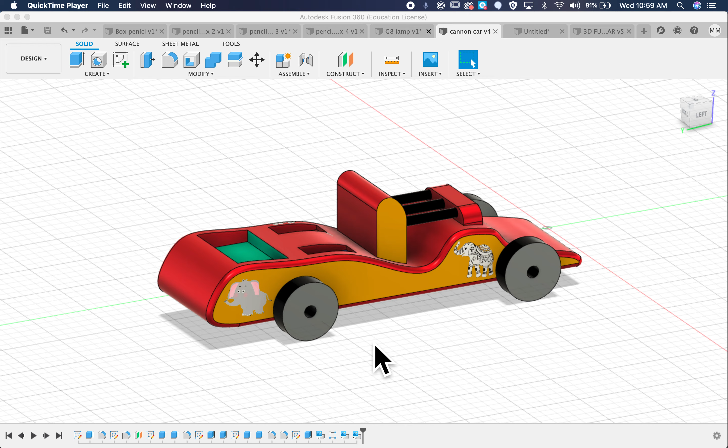Welcome to a quick tutorial on how to create more visual representation of your car by adding decals. You can see there are a couple of decals here, adding wheels and coloring it.

First thing I'm going to turn off all my sketches because I don't need to see them. I don't need the origin either. All right, so I got my car.

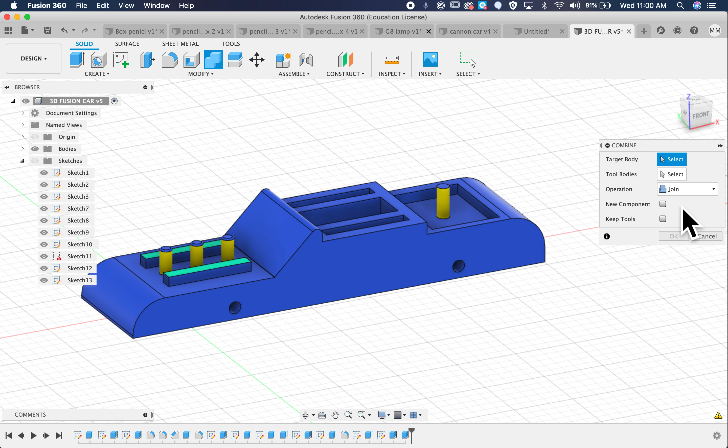To color your car, you're going to go into the Modify menu and pull up Appearance. And you probably have just a steel satin.

So if you duplicate it, right click or control click and bring up this menu, hit duplicate, and then you can double click on any of these and create colors.

Click done. Once you have your colors, you can drag those colors and it will change the color of everything. So let me back up one.

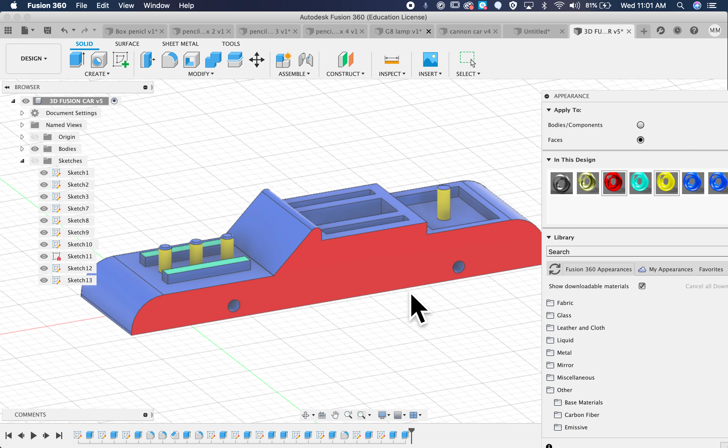If you want to just change the color of one face, you have to click on this face button. Then you can bring and change the color of one face. So if I want this to be red, and I want this other side to be red too.

Depending on your car, you're going to have more or less control over lots of different places. So, okay, that's how you change the color.

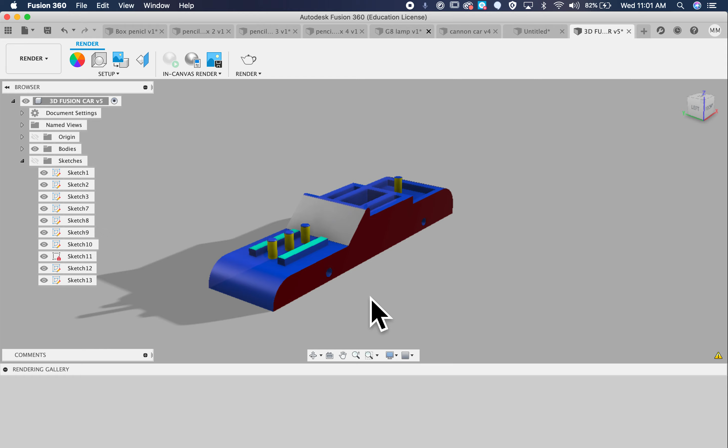If you don't like the steel satin, which when you go to the render makes it kind of shiny like this, you can also in the appearance menu turn it to plastic, and just use this white ABS.

Now that I have this white one, I have to duplicate it and then change the colors to the ones I want. Double click.

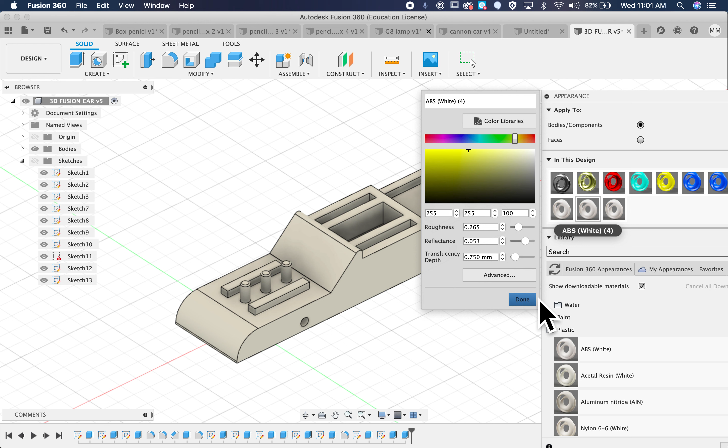Say I want a pink. Oh, this is going to be great. And then I can change the whole color and then change the faces of the things I want.

Lots of customizing. You can keep adding colors as you wish. Okay, just have a couple extra colors.

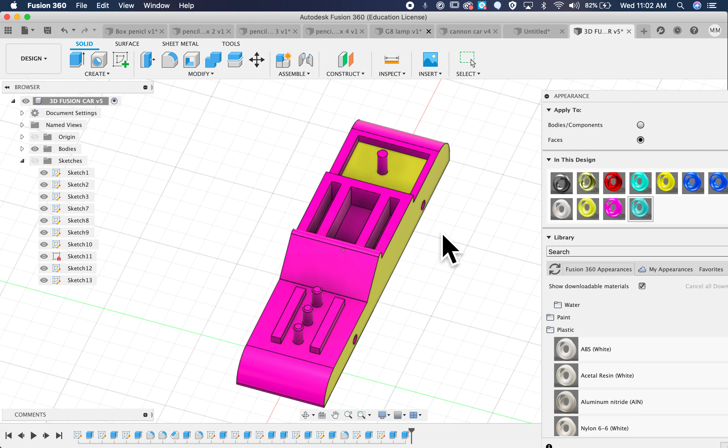So next thing is how to add wheels. Go ahead and create a sketch, create it on the side of your car. Create a circle. I'm going to create wheels that are 22 millimeters. Now that I've got that, I can finish the sketch.

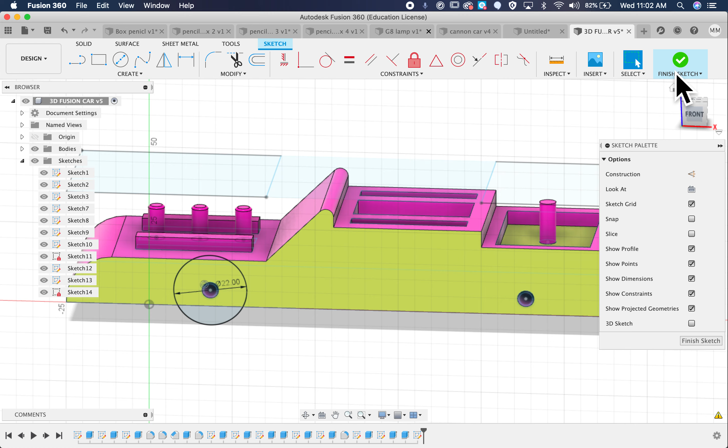Oh, I need to turn on that. Turn off all my other sketches. And then, oh, goodness gracious, I have to click on all of them.

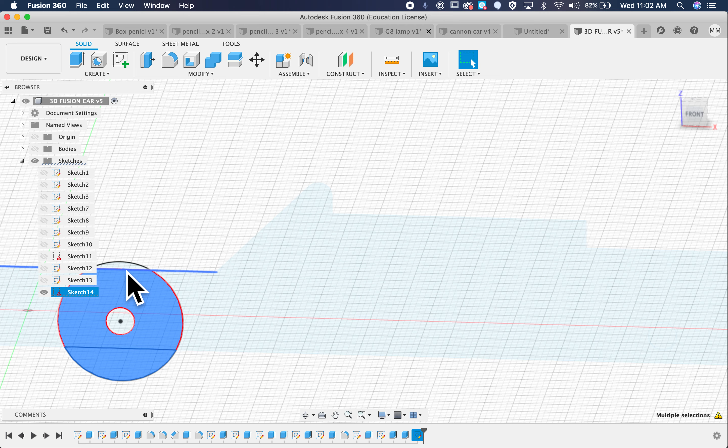Okay, so let's do this. Extrude. Let's click on all these parts. We can turn the body back on.

Now that we got this arrow, we can make the tires any which way we want. There they are. They're pink.

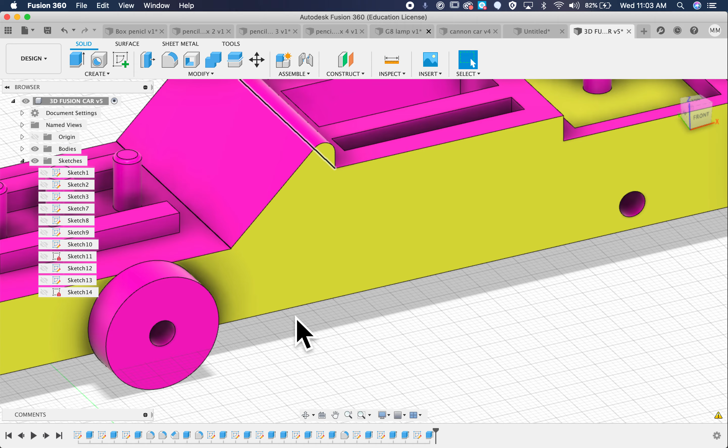I'm going to go back into the extrude and make sure that it is its new body.

Then, real easily, you can create a pattern, a rectangle pattern of this wheel.

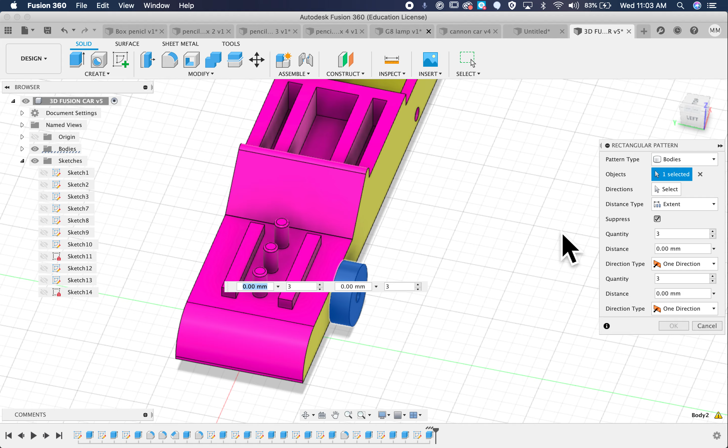We want to make a pattern that way and a pattern that way. We want two wheels and two wheels in each direction, so I'm just going to pull one wheel this way. Of course, you could just copy it as well if you know how to do that.

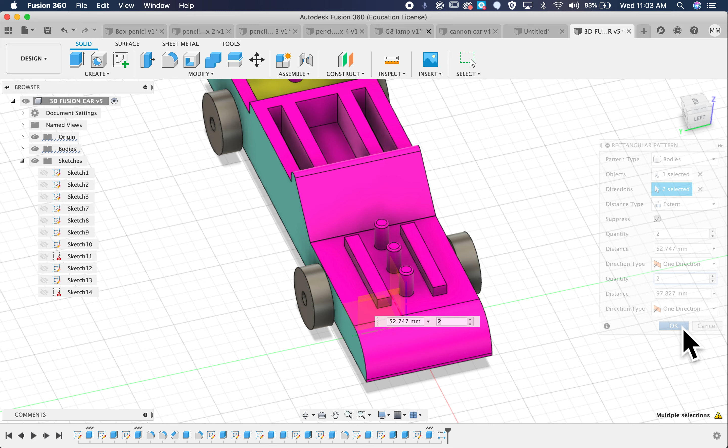Say OK. And then we have four wheels. So that was the pattern. You can go back and watch how I did that in two directions, or you could just move copy.

Let's see if I can do that. Click the copy button before you move it, and then you can move the wheels whichever direction you want.

Okay, the third thing is to put on a decal. So you can insert decal, and you've been looking for something on your computer. You should have, it'll take a JPEG or a PNG, and it asks you where do you want to put it. You can size it using this one right here, and move it around and say OK.

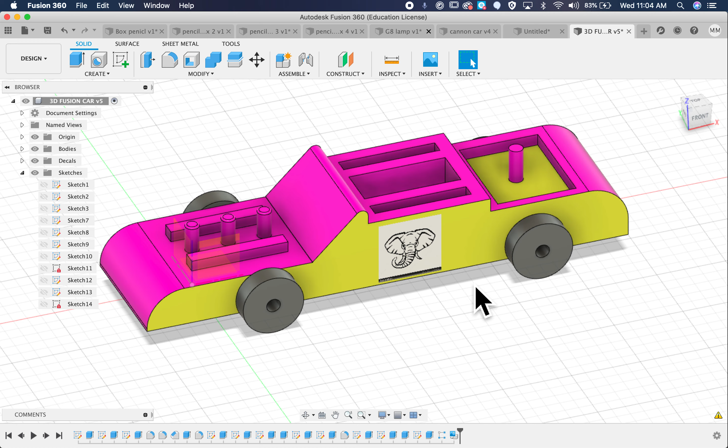If you don't like the white background, because that JPEG has one, you can always do what we did in Illustrator: open up a new document, place the JPEG or the PNG here.

Expand it. It is now an SVG, but it still has the border all the way around. So we're going to click on the direct select tool, click on the edge, click delete, delete. I don't want this thing at the bottom, so I'm just going to highlight it and hit delete too.

Now I have just this elephant's head. I put it in the center, file, export, export as, and we want this PNG.

Now I'm going to do it on this other side. I'm going to say insert, decal, insert computer.

We have that elephant that we've created a PNG of. We're going to place it right here. And you see this time it doesn't have the square around it.

And it looks a little bit better. So you can put a decal on any surface. Let's just try to put one on the cylinder.

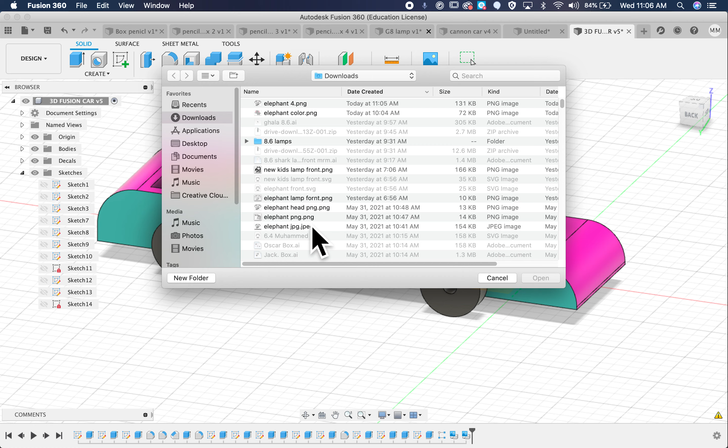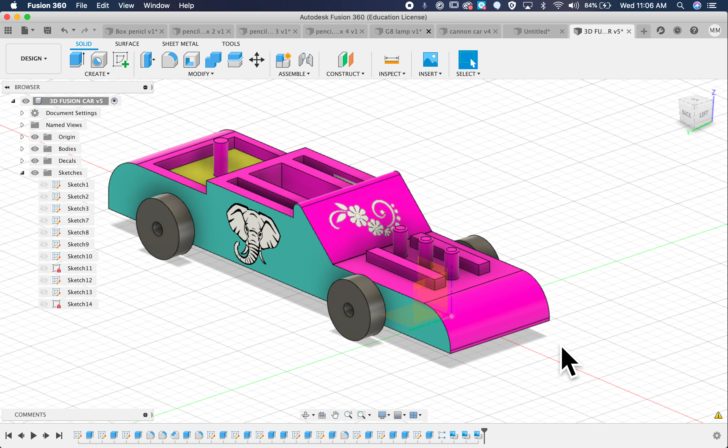I don't know, let's try to put one in here. That's a PNG, okay. All right, so that's how you do wheels, that's how you color it, and that's how you put a decal on it.